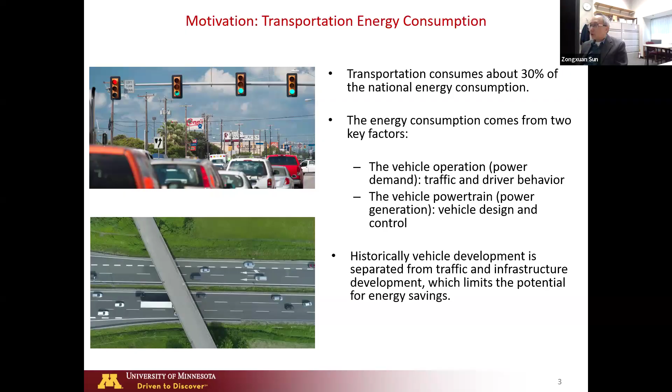So my overall message is I think there will be a lot of opportunities if we can better or seamlessly integrate those two factors. A little bit further argument along that line, people ask, well, sounds good. How do you actually integrate traffic and vehicle? Well, you do that by leveraging two emerging technologies. Those are relatively new, not brand new today, but relatively new. One is connectivity, the other one is automation.

Connectivity today is now widely commercialized. Automation, we have some commercialized already, but I wouldn't say widely commercialized. So connectivity gave us real-time traffic information, including information about other vehicles as well as infrastructure, such as signal phase and timing. So when we talk about traffic, it's not just about other cars. It's about infrastructure as well, because infrastructure controls influence the vehicle operation as well as the traffic.

So the information you collected through connectivity, essentially communication with other vehicles and with the infrastructure, provides you rich information where, if you use it properly, smartly, you can actually anticipate future driving conditions. Basically it means you can anticipate traffic in front of you in the future, not too long a future, but at least 10 to 15 seconds.

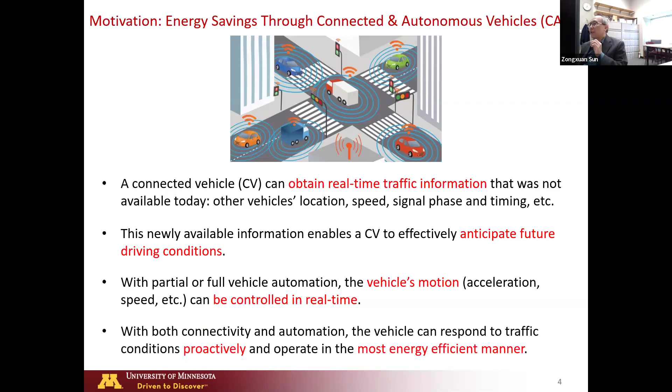And of course, with those two factors together, I think we have a strong opportunity to address the issues I mentioned in the previous slide. Okay, so continue on that.

So how do you actually bring this idea into actual implementation? How do you put this on the ground? How do you put this in the vehicle? How do you put this in the infrastructure to actually see the real benefit? How do we do that? So my group has worked on this for, I would say, probably 15 years now.

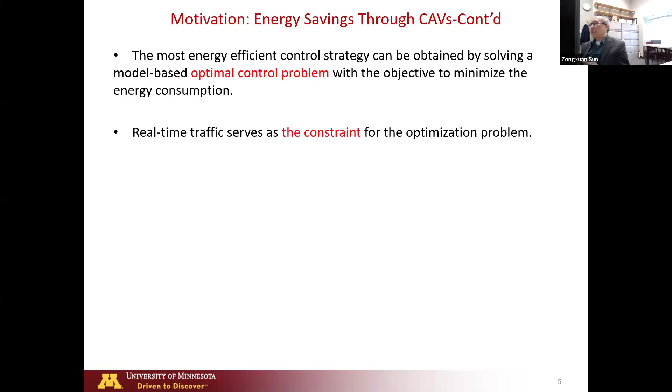So we actually are using the so-called optimal control framework. Okay, so we essentially treat the traffic as a constraint. As I said, you can't just drive any way you want. You have to follow the traffic flow. So we actually proactively predict the traffic. Then we use that as a constraint to our optimization control problem.

And then on the energy saving side, on individual vehicles, it can be saved at two levels. One is the vehicle level, essentially that determines the acceleration, the speed, which is your power demand. And the second level is the powertrain level. Even for the same power demand, you can operate your powertrain smartly, and therefore you have a higher efficiency. So even if your output is exactly the same amount of 10 kilowatts, you are much more efficient in delivering this 10 kilowatts.

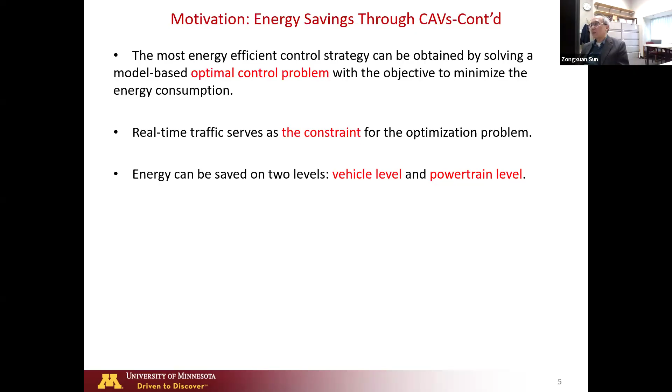Okay, so I talked about both already. So now let me show you what I meant on the powertrain level. So the powertrain level, those are three different type powertrains. You can buy all of them today on the market. I would say the conventional one, which is still the dominant one, is the internal combustion engine with automatic transmission. So that is still the dominant powertrain architecture in America. The second one is hybrid electric vehicle. The third one is electric vehicle.

So different powertrains. I'm not going into the details about the powertrain architecture, which is the primary research area of mine. But the bottom line is for the same power demand, let's say one driver is test driving one car per day. So they are driving all kinds of powertrain architecture, and they are demanding exactly the same power demand. How would you use all the different powertrain architectures to satisfy this driver's demand efficiently? So you have to essentially control those powertrains in real time.

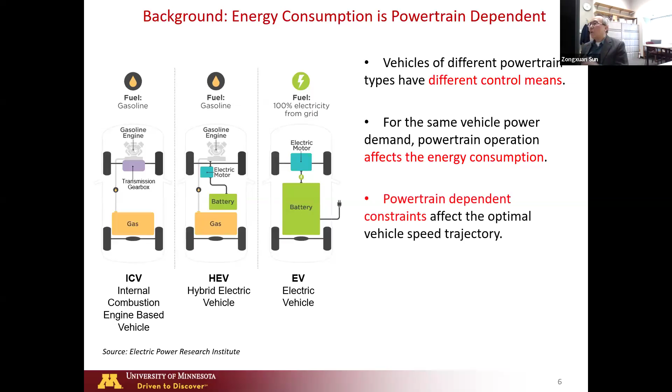Then the question would be, oh, what do I control? Which I talk about in the following slide. But the bottom line is, again, you have vehicle level optimization, essentially the speed and acceleration, and you also have a powertrain level optimization: how do I produce power efficiently to satisfy the power demand? And both have to be connected to the real-time traffic and infrastructure. Only then have you maximized your opportunity for saving energy.

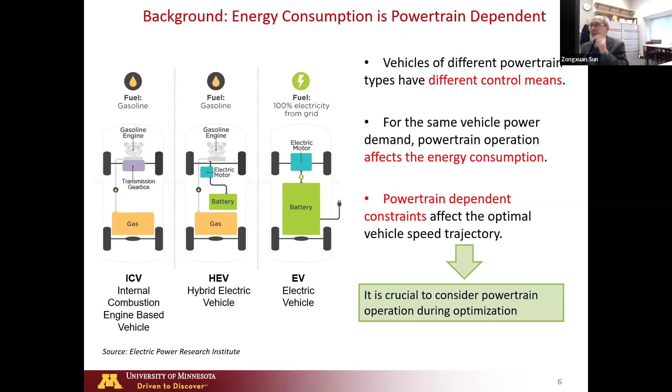Okay, one question people always have when I talk about predicting traffic, they say, well, how can you predict traffic? Because now, even if you have CV technology, not everybody is going to talk to you. And many existing vehicles have no way of predicting, they have no communication device. What do you do? So we recognize the fact, no matter how we introduce a new technology, connectivity or automation, we're going to face a mixed traffic scenario, which means it takes time for the technology to penetrate the market. So we're not going to have 100% CVs. We're not going to have 100% automated vehicles anytime soon.

So there will be a market percentage. So how do you do that? Not everybody talks to you. You say, oh, I collect information, therefore I can predict the traffic, but they don't talk to you. What do you do? Well, you can still predict traffic with limited information. You don't have to have everybody talk to you. You don't have to know every individual vehicle's information.

And therefore, we are using traffic flow theory. We're working with Michael, treating the traffic as a fluid. Then it becomes a continuum where you actually do not need to know individual vehicles. You only need to know information at certain points. Then you use that and physical laws to synthesize the dynamics of the traffic. So that's the basic idea on this slide, because this is a real issue.

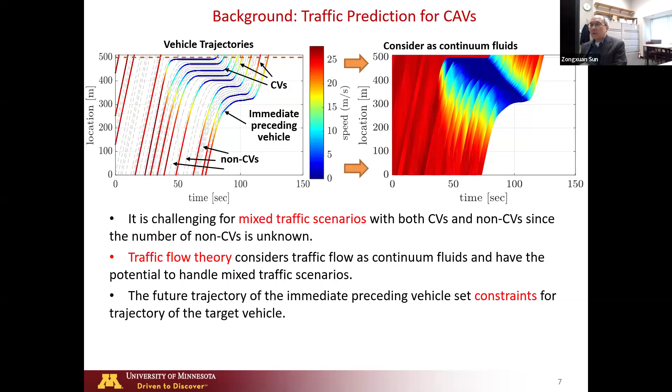So let me now run through a couple examples. I know I spent a bunch of time on background because that was intentional—I want to make sure people at least understand my rationale. When I go to the specific project, I'll run a bit faster, because some of those are a little technical, so I'd be happy to answer questions or follow up. I have to go a bit faster because I've got four examples here.

So the first one is actually a test bed, funded by the Federal Highway Administration as well as MnDOT. The whole idea was that testing all this technology on the road isn't easy, and precisely measuring fuel economy and emissions isn't easy either. We actually have very precise fuel measurement as well as emission measurement instruments in our laboratory, so the idea is: can we have a hardware-in-the-loop test bed?

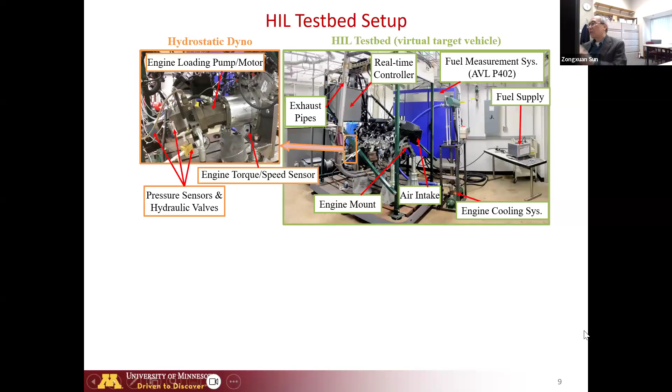With that, we used the same engine, a GM 3.6 LFX engine, which was in a Cadillac SRX. That was the car. We did that, and we obviously had information and data from the vehicle, and we used that to calibrate the model to make sure they actually match.

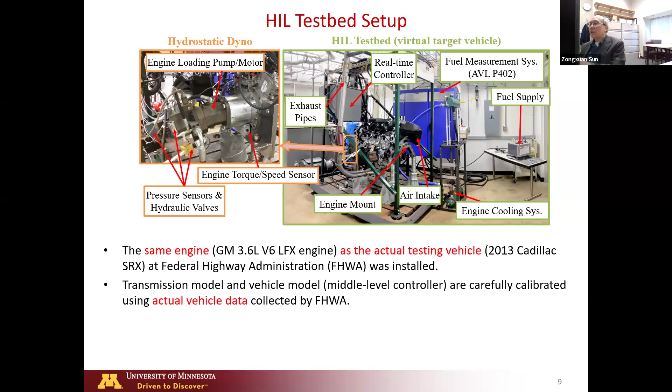So that was the objective: to see if you can evaluate all kinds of energy-saving methods and technologies on the vehicle in the test cell, without actually going to every single vehicle. Going to every single vehicle is costly, and there are also safety concerns. So that was the motivation for this project—essentially a test bed to test energy-saving technologies inside the laboratory with precise fuel economy and emissions measurement.

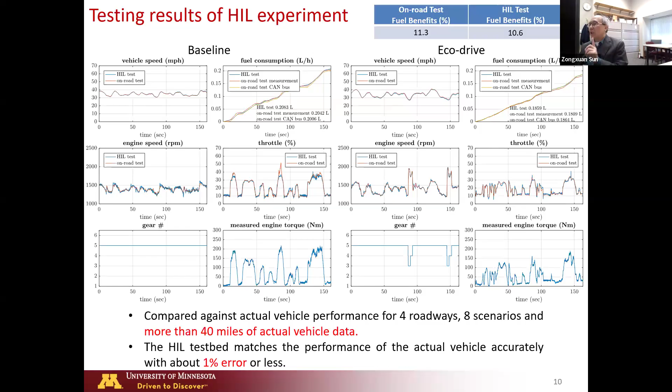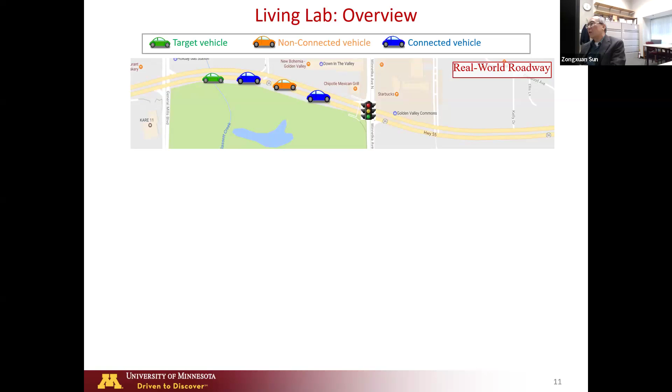So we also did a living laboratory. A living laboratory basically means you get cars driving on the real road, and you also talk to the signal controller. Here you can see the signal controller on Highway 55, and here you can see all the testing vehicles. This way you bring real traffic data into the laboratory.

What we do is the last car here, the green one, is a fictitious car—it's not a real car. This car is actually the test cell, a virtual vehicle inside the test cell, because we get all the information about all the cars in front of this fictitious car through communication. All the other cars are real cars, and the signal is real too, but this one is virtual, as if we are following the other cars.

We can collect signal phase and timing information, and we can get other vehicles' information. Based on that, we predict the traffic, and based on that, we control our own vehicle motion. We also control our own powertrain operation, then we see how much energy we can save. So this is a safe way of testing all kinds of methodology.

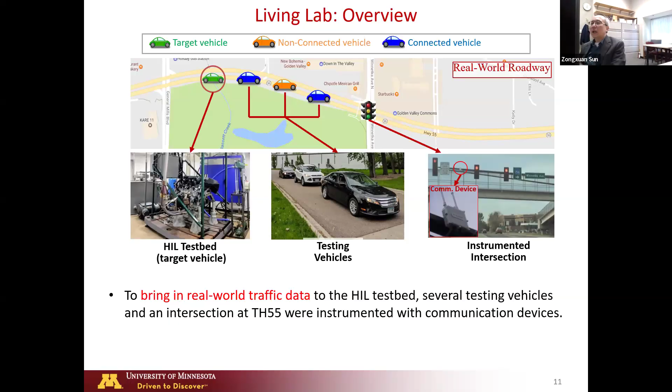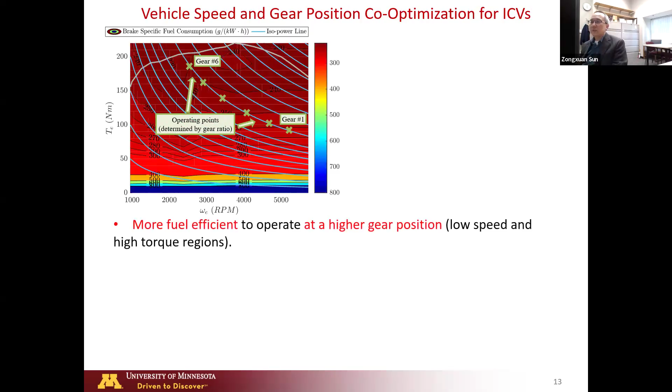So what is the biggest factor that affects a conventional car? A conventional car refers to an internal combustion engine with an automatic transmission—that is still, as we speak, the predominant powertrain in America.

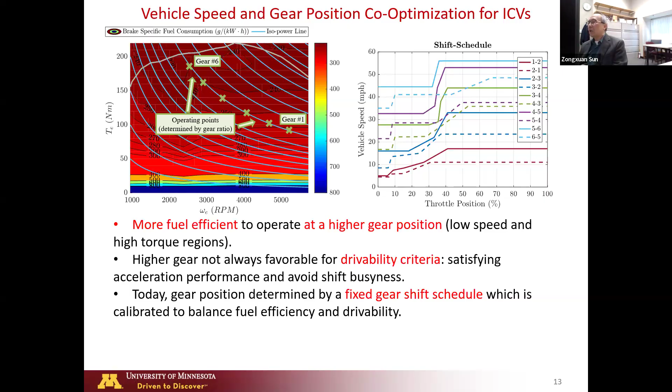But that map is calibrated before the vehicle was sold to you. It knows nothing about the traffic, and it does not know how you're going to use it. If you actually know the traffic in front of you, you can optimize the gear position and gain even better fuel economy. That's the basic idea.

So let me show you the framework we had. Essentially, we have traffic and traffic signal data. We send that to the so-called traffic estimation, then we run a real-time optimal control, which controls the vehicle. That's how you close the loop, integrating traffic with vehicle operation as well as powertrain control. In my domain, this is called model predictive control, meaning you are predicting the future with the model to determine your control.

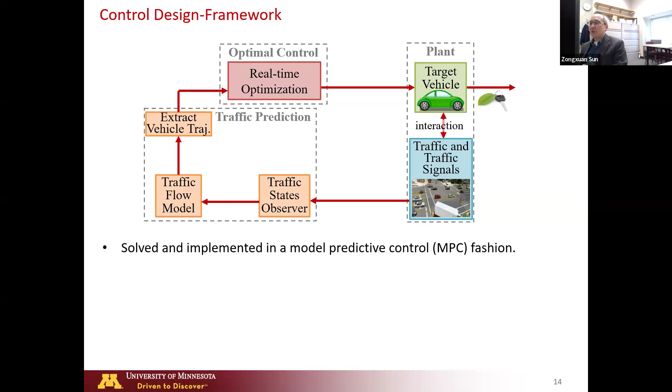I'm not going to go into the details on how these things are done. We wrote a bunch of papers, and if you are interested, I'm happy to share the papers with you with all the technical details.

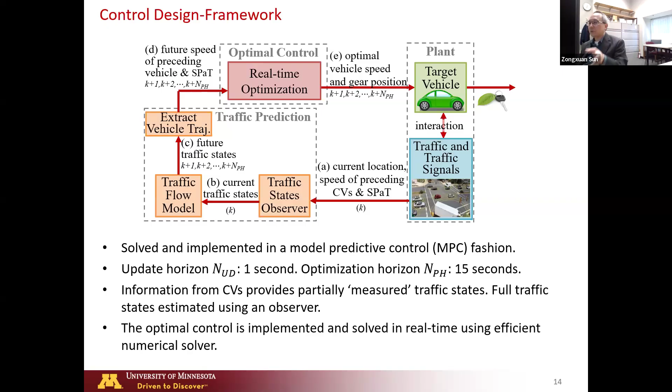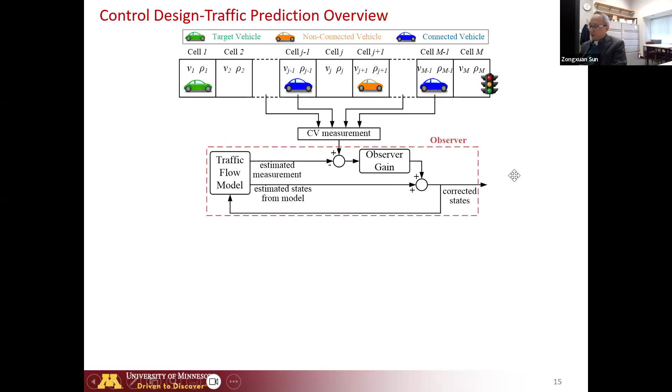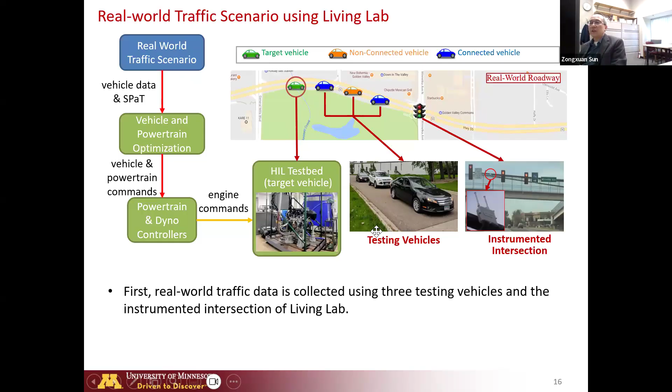That's the traffic prediction part. I'm not going into the detailed series, but just to show you, here's the overall architecture. We get the signal, we get real cars, we get this dyno, so we can close the loop.

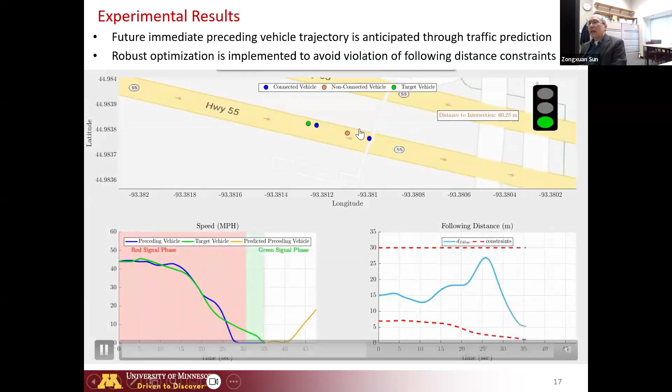Let me just run a small video here. The green vehicle is the one controlled by us. As you can see, because the signal ahead of you is red, it intentionally slows down. You can see the spacing between this vehicle and the preceding vehicle getting bigger as it approaches the intersection, because it knows it's red and there's no way you can pass it. By doing so, it reduces idling time, because as soon as this vehicle arrives at the intersection, the signal turns green, so the vehicle can get going. That's an obvious strategy you can do if you actually know the signal phase and timing.

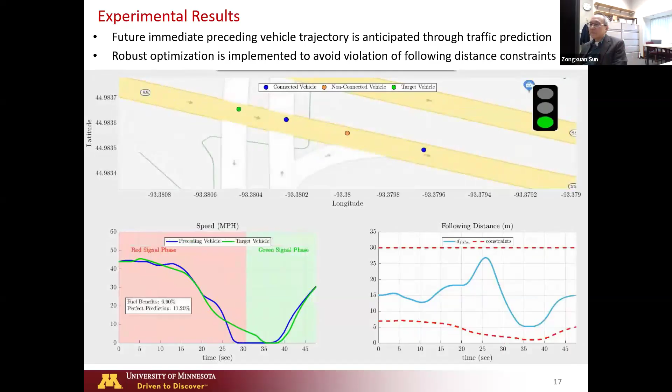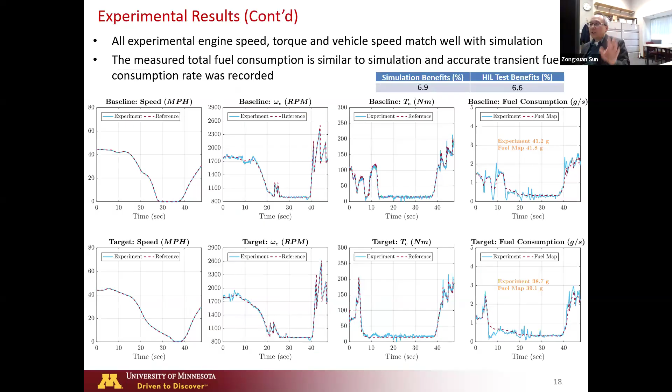This example shows that, and here's what we got from the test bed in the test cell. The engine was driving as if it is on Highway 55, approaching the Winnetka intersection. All the fuel economy and emissions data have been recorded in real time.

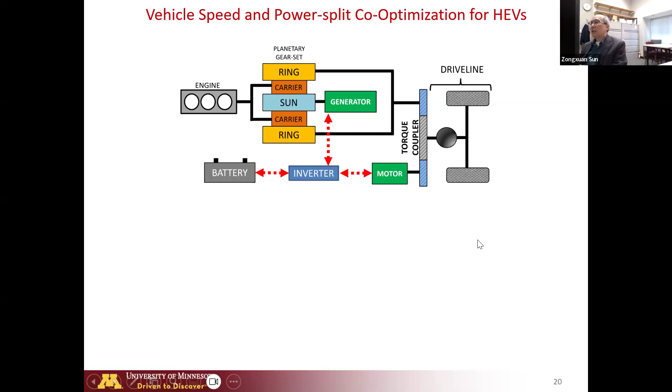Basically, part of the engine energy is being converted into electricity by the generator. Then that electricity is used to propel the motor back to mechanical motion. That's why it's called power split hybrid transmission.

Okay, so that's a hybrid architecture. You have the battery here, and with this extra degree of freedom of the battery, at every time instant, as your car is moving forward, you have a power demand.

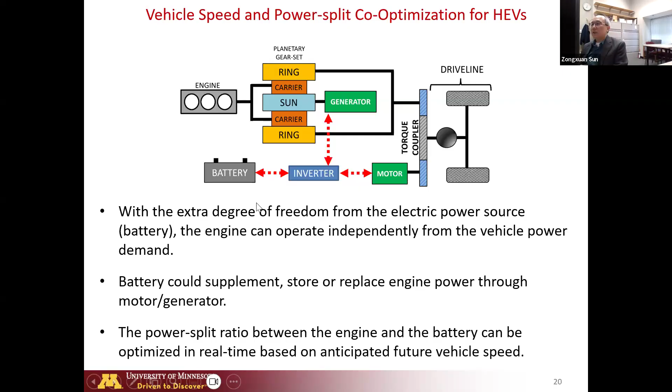You can determine how much power you want to get from the engine and how much from the battery. So you have two choices, you can split between the engine and the battery. That gave you an extra degree of freedom, which you wouldn't have with the conventional powertrain, where you only have the engine. And here shows you the research we did.

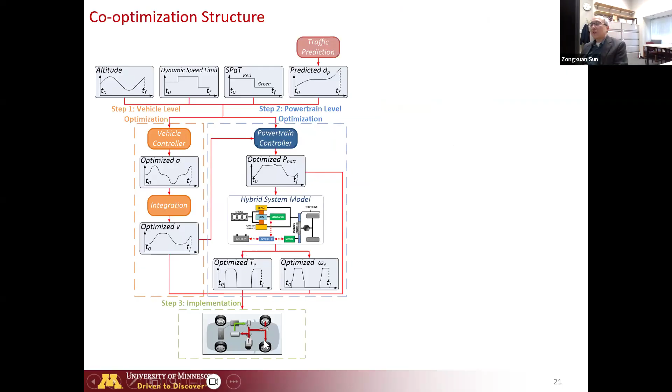Again, you can do traffic prediction, and with that prediction, you can optimize how you want to drive at the vehicle level. Then you go to the powertrain level, where you determine how much you want to get from the engine and how much from the battery. Then you deliver the whole thing to the vehicle powertrain. That's essentially the idea.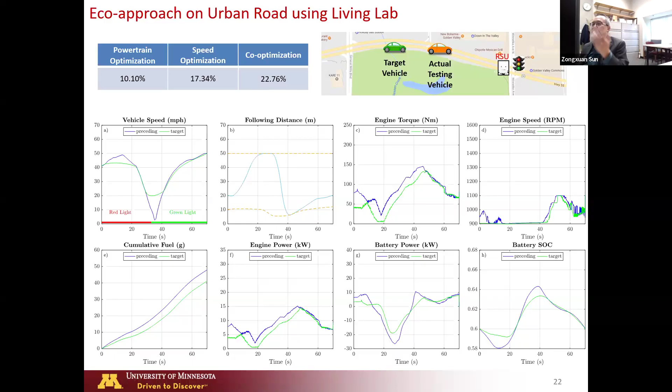you take out the human, and the vehicle knows when to accelerate and decelerate, you get 17%. But if you do them together, you get 22.76%. So that's the benefit we found.

Last topic, electrical vehicle. With an electrical vehicle, obviously you do not have an internal combustion engine. All you have is a battery, inverter, and electrical motor going to the wheels of the vehicle. That's what you get. By the way, in this specific presentation, I show you a fixed final drive, which is the most typical arrangement in today's EVs you buy on the market.

However, there are a few EVs that actually have more than one gear after the motor, so you can have a 2-speed or 3-speed transmission even for an EV. In fact, my students have done work on a multi-speed electrical vehicle study, so if you're interested, I'd be happy to talk to you about that as well.

So if you have that, you also have to make a decision about which gear you are in for the EV at every time instant. That also has significant energy implications.

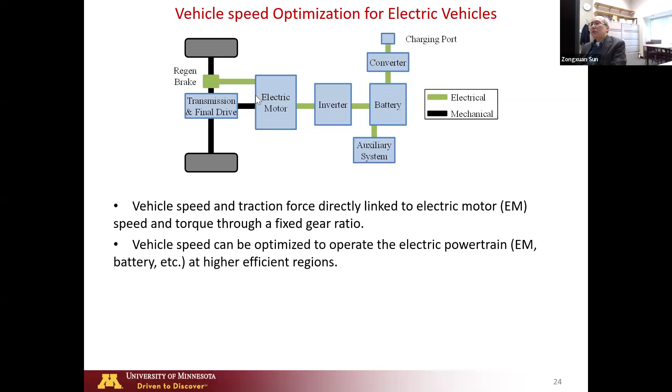With a fixed gear, when you drive at different speeds, because the gear is fixed, your electrical motor speed is determined as soon as your vehicle speed is determined. But your electrical motor efficiency depends on speed and load, so we have to bring in the efficiency map of the motor as well as the efficiency of the battery into consideration when we optimize the overall vehicle efficiency. That's a key consideration here.

The other consideration is regenerative braking. With the electrical vehicle, you can have regen, meaning as you slow down, rather than using a mechanical brake to burn out all the kinetic energy, you actually convert that into electrical energy. You want to maximize your regen.

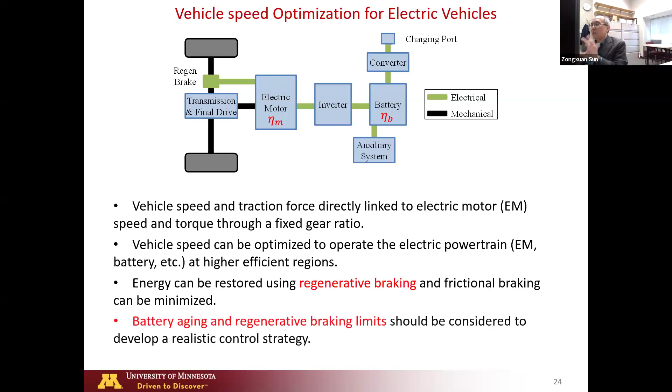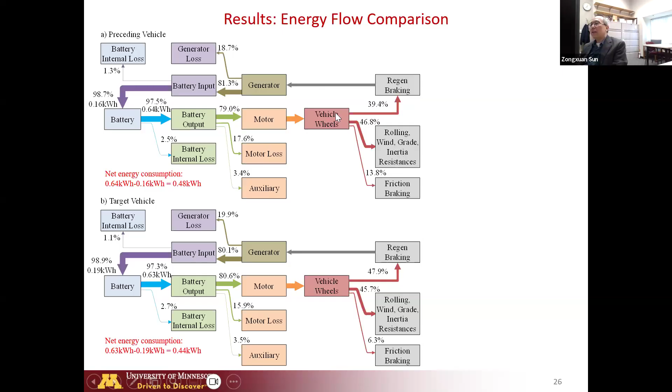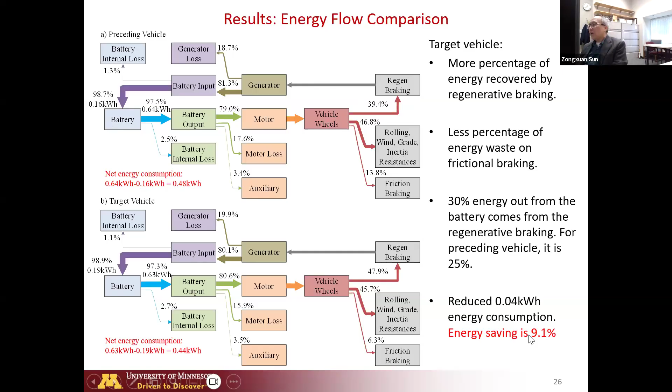So you can see the bottom line is, with the optimization, we are improving about 9.1%. We have less energy going to the mechanical brake and more energy going to the regen, saving 9.1% as a whole. That brings me to the conclusion.

So again, my message, as I said at the very beginning, is that integration of real-time traffic and infrastructure information with vehicle control can offer significant opportunities for reducing transportation energy consumption.

This has not been done historically. There was a good reason for that, okay? But I think now with the two new technology, connectivity and automation, we are at the time there is a good opportunity we can really integrate these two factors in transportation.

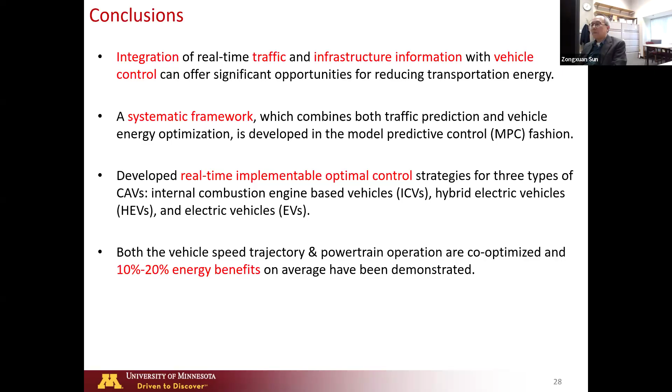A systematic framework which actually tries to combine this under the so-called MPC, model predictive control, has been presented today. And we also show real-time implementation applied to 3 different powertrains: the conventional one with the engine, the hybrid electrical vehicle, as well as the electrical vehicle. We show you can get between 10 to 20% benefit depending on the traffic and depending on the type of powertrain. With that, I'll stop my presentation. Thank you.

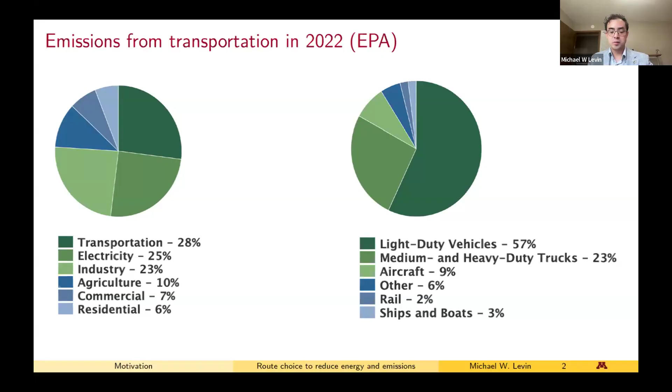I'd like this graphic to introduce what we are gaining by focusing on emissions in transportation. This is from the EPA in 2022. They release a new graph like this every couple years or so, but the numbers don't change that much. The emissions from the USA, if we look at total greenhouse gas emissions, 28% come from transportation. And if you look at the breakdown of transportation specifically, in terms of vehicles on the road, we have 57% from light duty vehicles and 23% from trucks. So there's a lot of opportunity to improve total US greenhouse gas emissions by reducing emissions from transportation, and that's what we want to focus on.

When you're driving in congestion on an arterial or on a freeway, you have a lot of frequent speed changes. What happens with speed changes is that you have to spend energy accelerating, and a lot of that energy is often going to be lost when you have to brake to slow down, unless you have a really good regeneration system for a hybrid or electric vehicle. Another thing is that road power depends on how fast you're driving, but looking at the powertrain side, internal combustion engine vehicles, which are most of the vehicles on the road, are usually more efficient at higher speeds. So with congestion, there are two impacts that result in emissions being higher relative to driving without congestion.

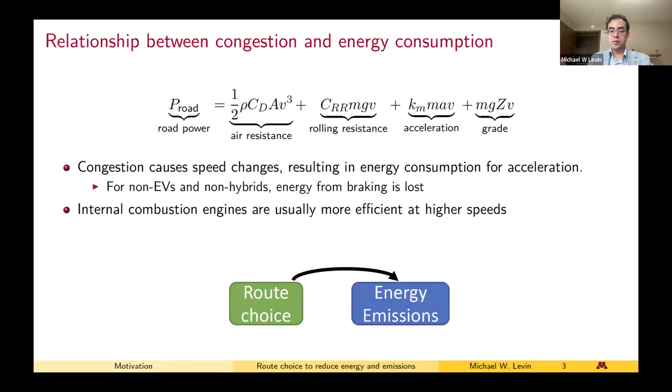And that's exactly what Google Maps started doing in 2021. If you wanted to open up your phone right now, you would see that there's an option in the settings that says, do you want Google Maps to give you routes for the minimum travel time or the minimum CO2 emissions? By default, Google Maps is set to minimize your individual CO2 emissions, which is related to travel time, of course. Having a long travel time is going to increase your emissions, but it's not exactly the same. So right now, most people using Google Maps, unless they're particularly aware of this and changing their settings, are probably going to be minimizing their individual carbon dioxide emissions instead of their individual travel time. Okay, great.

If you have 40 to 50% of drivers trying to minimize their individual emissions, that's going to affect congestion patterns. The route choices of those drivers based on emissions will affect congestion patterns, which affects the emissions that result from those route choices. So the question is, if you have 50% of drivers trying to minimize their individual emissions, how does that actually affect the total system emissions for all vehicles, both the ones minimizing emissions and those minimizing travel times? We have this feedback loop where route choice affects emissions, which affects route choice, but an equilibrium forms as your emissions affect your route choice, which then affects the emissions of other vehicles.

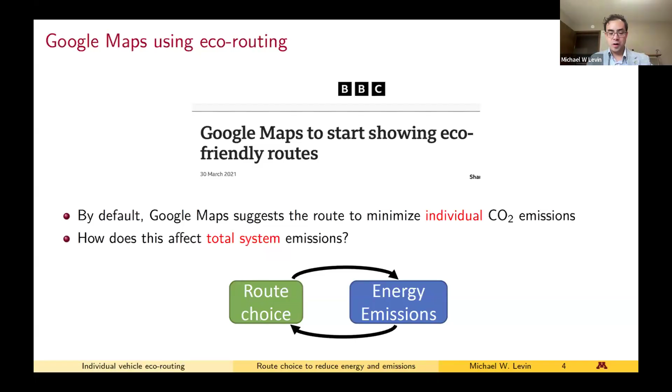Before I show that, I want to go back to a classic example of looking at route choice and travel times, because that one's easier to understand. There's a well-known concept from the 1950s called user equilibrium, which is the idea that when drivers choose routes to minimize their individual travel times, their route choices affect the travel times of other drivers, which in feedback affects the route choices of the drivers as well.

We want to find user equilibrium, which are route choices where no driver can improve their travel time by changing routes. In other words, you're on the shortest route and there's no incentive to change. That's user equilibrium behavior, true for everyone. But it's not the same as minimizing traffic congestion. This is similar to emissions, because instead of route choice and travel time having feedback, with eco-routing we have route choice and emissions having a feedback loop.

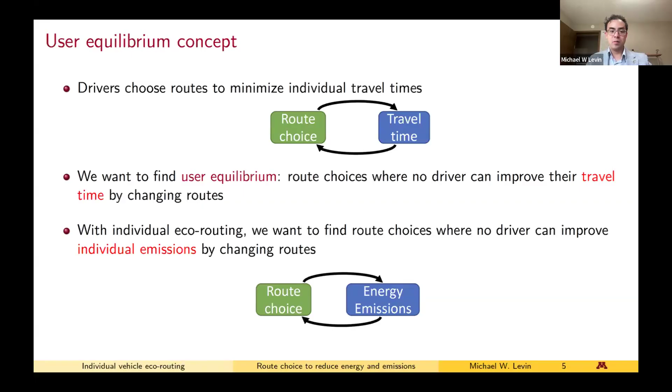Let's spend a little time looking at travel times. I want to review the well-known Braess paradox, which demonstrates the problems with individual travel time, or user equilibrium behavior, which is what people are normally doing when minimizing their individual travel times.

I'm going to draw this simple network. It has 4 nodes, A, B, C, and D, with one-way roads connecting A to B, B to D, A to C, and C to D. The functions shown are the travel times. The travel time from A to B is x over 100, where x is the flow, the volume of cars. A to C and B to D have constant travel times, so no congestion there. C to D has a travel time of x over 200.

If we look at 4,000 vehicles per hour traveling from A to D, the split that forms user equilibrium is 1,000 vehicles going on path A to B to D, and 3,000 vehicles going on path A to C to D. The reason this is user equilibrium is because the travel times are equal, meaning there's no incentive for any driver to switch paths, since they'd have the same travel time.

The classic example is: let's say we have this network and we build a new road from B to C, with a constant travel time of 5 that never gets congested. So what happens to the user equilibrium behavior? Ideally, when you build a road, you'd like travel times for everyone to go down, right? That's why you build roads, to make transportation better.

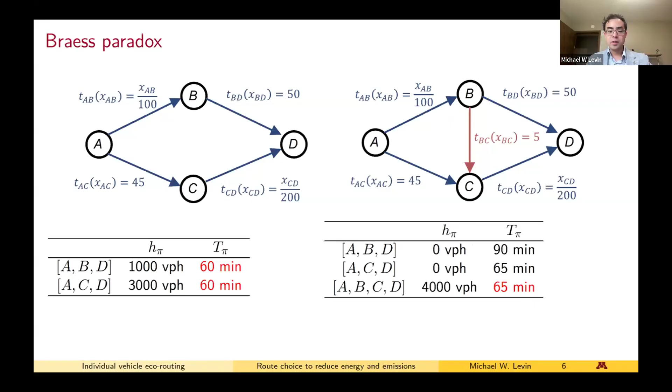What happens is that by building this link, or changing, in other words, the route options for travelers, we now have everyone creating a lot of congestion on links A to B and C to D, and paradoxically, that makes the travel times for all drivers increase because they're all trying to minimize individual travel times. So in other words, there's this well-known fact that building or improving a road can make traffic worse due to user equilibrium route choice. There have been a few examples, I think, in New York, Germany, and South Korea, where people observed this in practice.

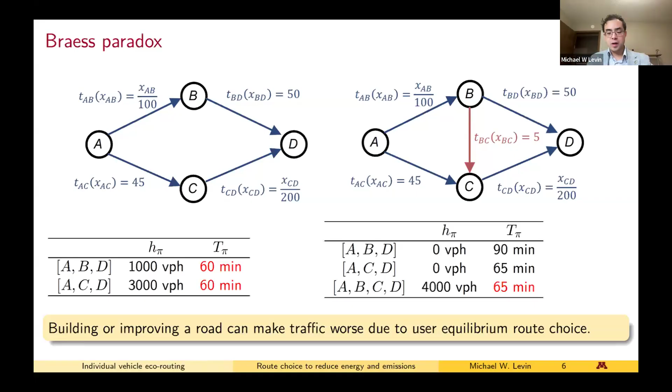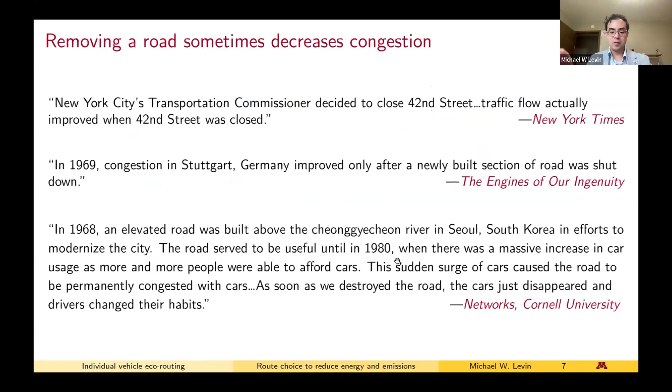So of course, this is for travel times. I want to focus on emissions. We're going to see a similar effect there. Yeah, so here's a slide with the examples I found in New York, Germany, and South Korea. You can look these up as well. It's basically the reverse situation where they removed a road and found that travel times went down by removing a road.

So looking at this Braess paradox, this is saying if we build a road, we can actually increase travel time. And the reason that happens is because when you build a road, you're hoping that road reduces the total system travel time or the traffic congestion. But when drivers choose to minimize their individual travel time, that's actually a different goal. It's a subtle difference, but it's a different goal, and that results in different route choice patterns.

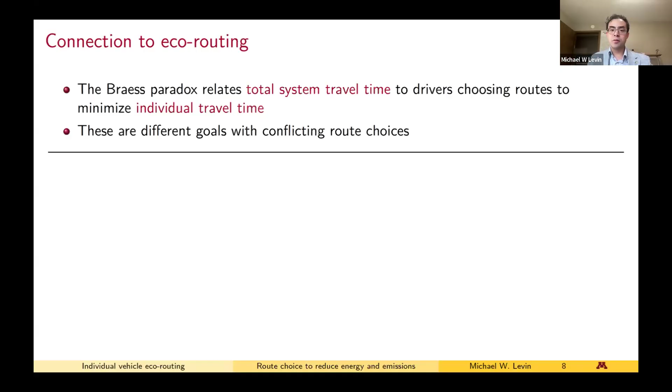So we're going to see the same effect when we look at Google Maps. By guiding people on routes to minimize their emissions, if we have enough people following Google Maps, we end up creating scenarios where the goal of reducing individual emissions is different from the goal of reducing total system emissions, and these actually conflict.

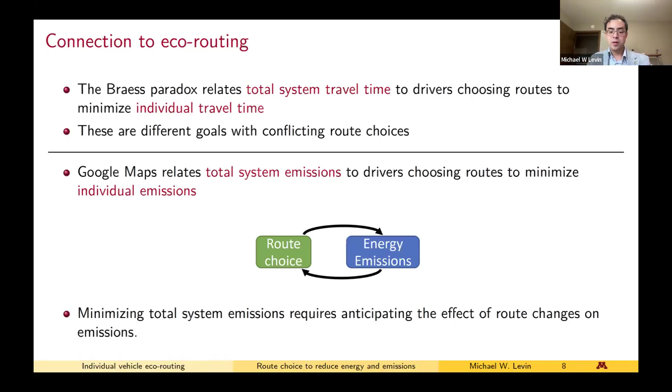So in other words, when we try to minimize total system emissions, we really need to anticipate the effects of these route changes on emissions. If we just try to minimize individual emissions, we're not necessarily going to reduce our total system emissions at all. And so that's what I'm going to show you in the next few slides. We want to look at how well individual vehicle eco-routing works.

Now, to do that, we have to create some models of the emissions that people would use to choose their routes. And I've obtained some models from a paper in Transportation Research Part A from 2013, where they used the EPA's MOVES software, which is very well accepted in terms of predicting emissions, and they input a standard traffic model, and they ended up with these regression models for fuel consumption and emissions.

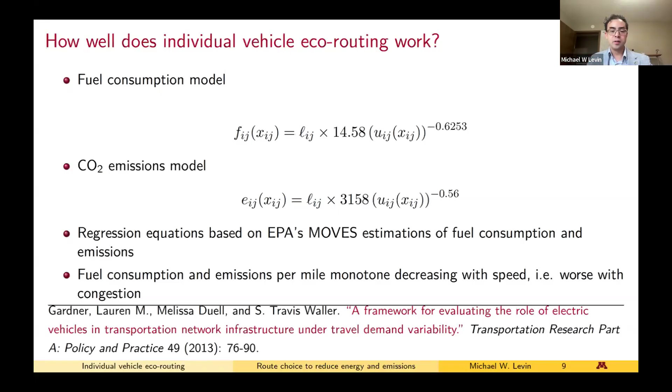These are interesting because they're monotone decreasing with speed. In other words, as congestion increases, the fuel consumption and emissions per mile increase, which is the pattern we would expect, as we saw a few slides ago. So what we're going to do is predict that drivers will choose routes to minimize either fuel consumption or emissions, and we want to see how that affects total fuel consumption and total emissions.

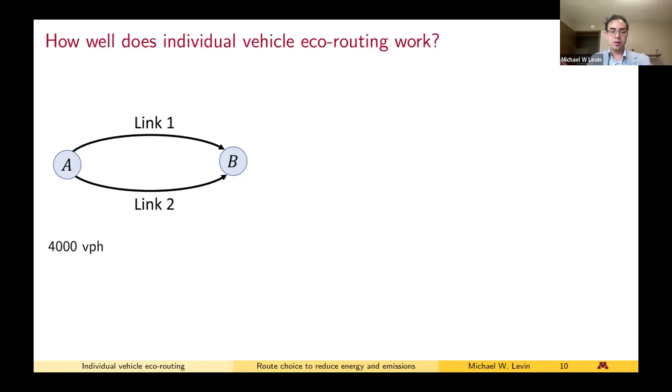So let's start off with a very simple network with just two links, link 1 and link 2. So drivers are going from A to B. There are 4,000 vehicles per hour going from A to B, and they have the choice of either of two links. Now, what I was looking at is what happens if you vary the parameters of these links? And specifically, let's vary the length of link 2 and its free flow speed.

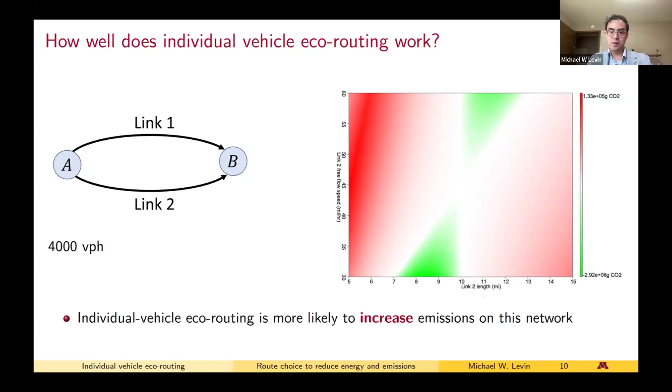Why does this happen? It's because the route choice patterns create different congestion patterns, which cause different levels of emission. And I want to do this not just on a simple network, but also on larger networks. And to make this more realistic, I've also created examples where some of the drivers are eco-routing, some of the drivers are trying to minimize their travel time.

So in other words, the route choices affect congestion or emissions, congestion affecting emissions, of course, and then those affect the route choices. In other words, what we want to do is find a mixed user equilibrium where it's a route choice solution where no driver can improve their goal by changing routes, and the goal of each driver could either be minimizing their travel time or minimizing their individual emissions.

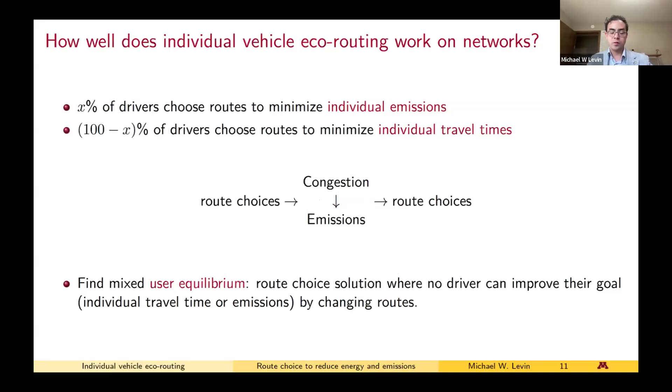So I have several networks here. These are networks that are standard test networks, are publicly available, but they are fairly large, a lot larger than the previous toy example I created. And so the point of this is to show the effect of eco-routing on various cities. So let's look at Eastern Massachusetts, for example, which is on the left here. As you can see, as the eco-routing proportion increases, the total emissions decreases slightly, and then it starts to increase again as the proportion of eco-routing vehicles passes 50%.

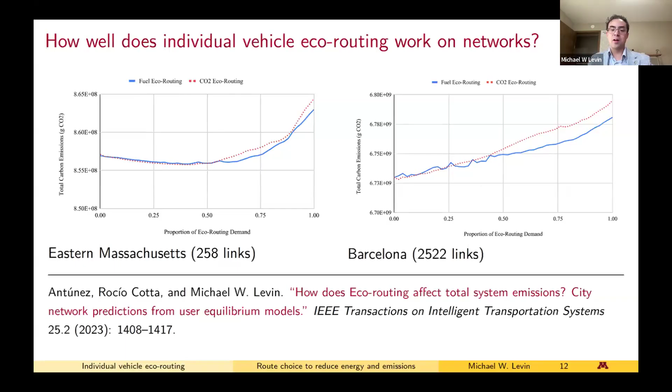Looking at the right network, Barcelona, we see that the total emissions is just mostly increasing with the proportion of eco-routing demand. So in other words, what's happening is that as we have a large number of people eco-routing, that affects the congestion patterns and it causes emissions to increase. Now, that's not true for every city. Winnipeg has the same pattern where increasing numbers of eco-routing vehicles increase emissions, but Chicago is the opposite pattern where as people start eco-routing, the emissions decreases.

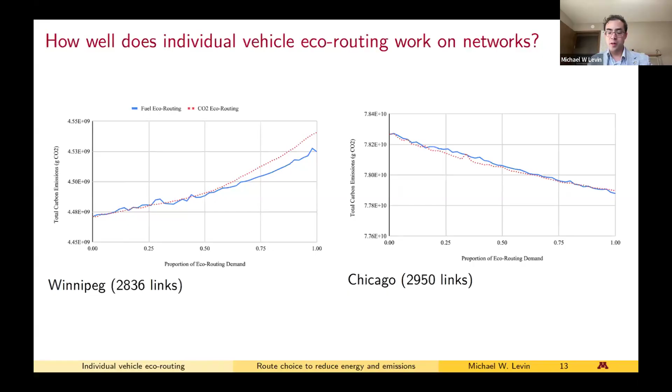But hopefully this kind of demonstrates that it's not as simple as just trying to get people to minimize their individual emissions. We need to do something more complicated. And the fact that Google Maps is actually giving us routes to minimize individual emissions may not necessarily be good in every city. It may be increasing emissions in some cities. So that brings us to the question of how do we actually minimize total system emissions with route choices? Because indeed we can. So looking at that problem, we have to consider why it's difficult.

If we try to choose routes to minimize total system emissions, we have to consider not just the impacts of routes on an individual vehicle's emissions, but we must consider impacts of route choices on congestion, which would affect the emissions of other vehicles. So in other words, if you decide to use, say, I-35 instead of Highway 88, you're now affecting congestion on I-35, which is going to affect the emissions of other vehicles using I-35. And if there are a lot of other vehicles on I-35, you've now possibly increased the emissions for other vehicles while reducing your own. So you have to consider those impacts when we want to minimize the total emissions and not just your own emissions.

There are a couple other things that make this very difficult to solve, though. We don't really know future travel demand. In other words, there's a lot of uncertainty or stochasticity about when people want to travel and where they want to go. And if we're creating a planning model, we don't have to deal with that stochasticity. But if we're trying to route drivers as in Google Maps, we would, because Google Maps can't predict where people want to drive. What happens is as you pull out your phone, you ask for a route, and Google Maps has to give you a route. It doesn't know that in 5 minutes, someone else will want to drive to other places. So it can't plan for future traffic.

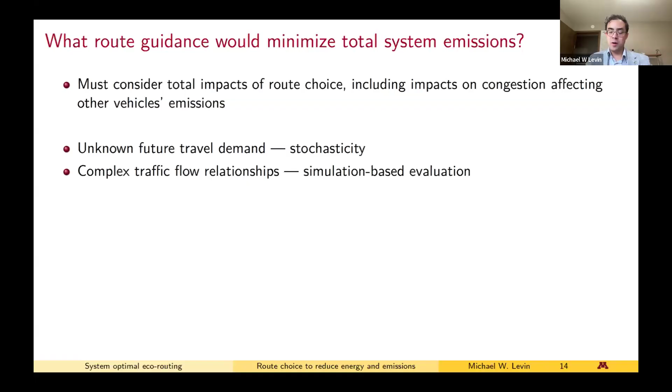The other problem that we run into is that the relationship between route choice and traffic congestion and emissions is actually very complex. And the models I showed before were simplified versions used for long-term planning. But if we want to reduce emissions on a day-to-day basis, we really need to use a more complex and realistic model. And these models exist, but they usually require simulation to solve, which makes it quite hard to solve optimization problems. So there are basically three algorithmic approaches that we might consider when Google Maps is asked for a route. How could we try to give the eco-routing to minimize total system emissions? So the simplest one is a long-term planning approach, static traffic assignment model.

It's a very simple traffic flow model. It's great for planning, still used. It doesn't really handle stochasticity in future travel demand, nor does it have complex traffic relationships like queue spillback, traffic signals, things that do matter in the day-to-day behavior.

The next extension is dynamic traffic assignment, which includes those complex traffic flow relationships, but it still does not have stochasticity. The other problem with dynamic traffic assignment is that optimizing it requires solving a very large optimization problem, and no one's actually managed to do that on any networks of reasonable size.

So the third approach that includes both stochasticity and complex traffic relationships is a Markov decision process model. We need a Markov decision process for stochasticity. It does model complex behavior, but it becomes even more difficult to solve in a traffic assignment. So keep in mind as we go through this, what I have is probably not the optimal solution, but we've done some mathematical work on getting something that seems to work pretty well.

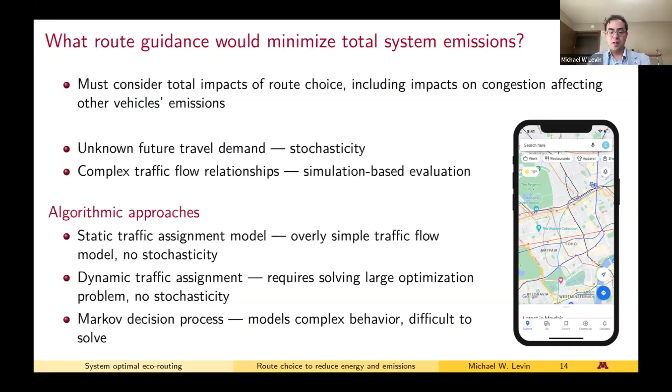So I want to spend some time describing this model. There's a lot of math here, so I'm going to go briefly through it. I want to hit on the concepts of how we model this. So we need to track the movement of vehicles over time. And the way we track that is by looking at segments of roads, like the segment of a road between two intersections. If we look at how many vehicles are on that segment of road, changing over time, there's a conservation law. The number of vehicles at time t plus 1 is the number of vehicles at time t minus all the vehicles that exited plus all the vehicles that entered.

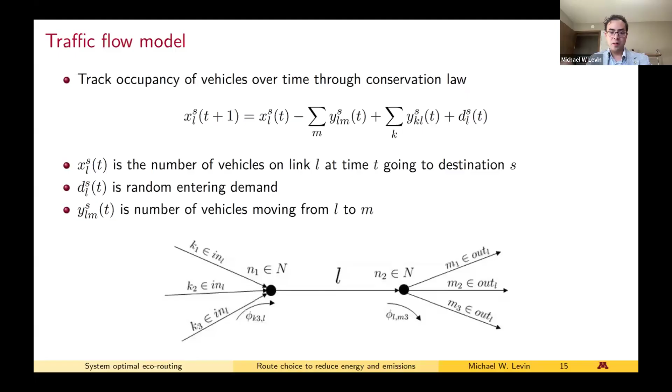So this graphic at the bottom shows an illustration of what that would look like. If we look at link L, there are 3 incoming links where vehicles can enter and 3 outgoing links where vehicles could leave. And the number of vehicles on link L, by conservation, stays the same unless vehicles exit or enter. We can also add intersection constraints to model whether vehicles are entering or exiting based on the proportion of vehicles that want to move from L to the next link, and then we can add further traffic signal constraints on this traffic flow model.

So what that would look like, in other words, is we have this Markov decision process where we have a one-step transition between the number of vehicles on a link at time t and the number of vehicles on a link at time t plus 1. It's a one-step transition because it's based on the entering and exiting vehicles at that time point. There's stochasticity in terms of entering demand, which creates a stochastic transition. The control variable is actually our route choice.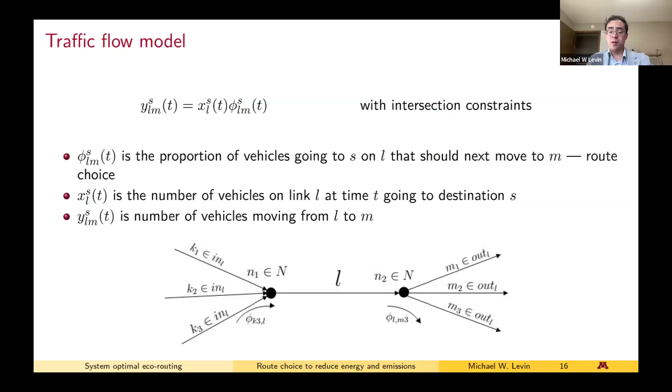So if we look at the vehicles on link L, someone's going to decide which link they go to next. Do they go to link M1? Do they make a left turn? Do they go straight to go to link M2? Do they make a right turn to link M3? That's what we call phi, or whatever their route choice is. So that's what we're going to control. And we can control this at each time point. At each time the vehicle tries to leave a link, we can decide where they go, which is akin to Google Maps updating the shortest path in the middle of your drive based on updated information.

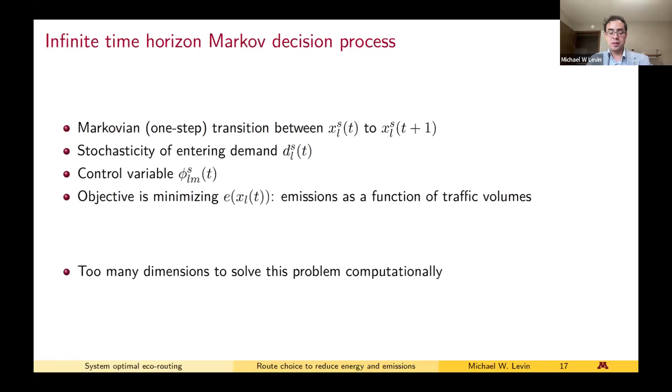The objective here, of course, is minimizing the total emissions, which you could write as a function of the traffic volumes on various links. It's just impossible to solve this computationally because there are too many dimensions, so this runs into the well-known curse of dimensionality. So instead, we're going to derive an algorithm that has nice mathematical properties in terms of reducing emissions. This builds on the max pressure approach, and the conceptual idea for max pressure is we choose a performance metric, find a simple algorithm, and then prove that our algorithm mathematically achieves that performance metric.

So the typical metric used for these approaches is maximizing throughput. And the way you formulate that in math is saying that the number of vehicles in a network remains bounded over time. What that means is that as vehicles are entering the network over time, people are departing their houses, they're departing parking garages, they're entering the network to drive somewhere. The number of vehicles in the network will increase as vehicles enter. So the only way to make this bounded is for vehicles to exit at the same rate at which they enter.

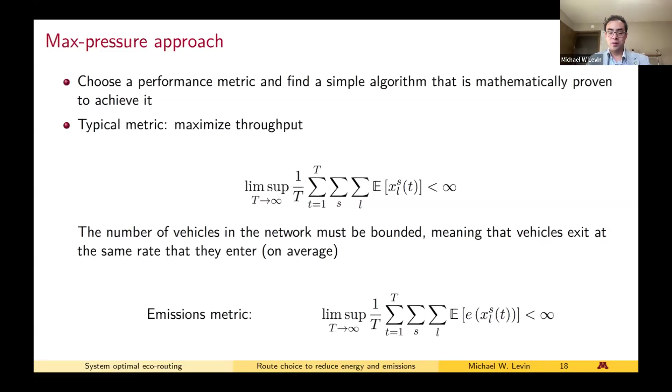So entering vehicles equal exiting vehicles on average, which achieves maximum throughput. Now, of course, we don't want maximum throughput here—what we really want is to minimize emissions. So I want to replace the idea of number of vehicles in the network being bounded with emissions in the network being bounded. If vehicles are accumulating in certain links or those links are becoming very congested, the emissions will become very large. So we want to maintain boundedness. Now this is admittedly not the same thing as optimizing total system emissions, but it does tend to work, as we'll see.

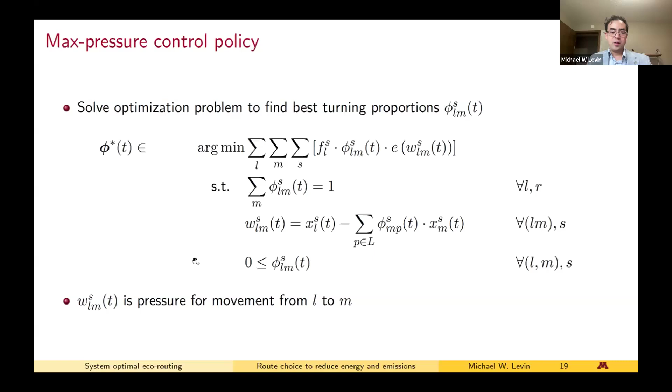For the max pressure algorithm, we want to solve an optimization problem to determine where people should drive. This looks like a nasty optimization problem, but it's actually quite easy to solve. What it's really doing is computing weight functions—basically the difference between queues approaching an intersection versus queues at the far end. In other words, we want to move vehicles from long queues to short queues, or from areas of large emissions to areas of smaller emissions, to get vehicles out of congested areas. The rest is just various constraints on those movements.

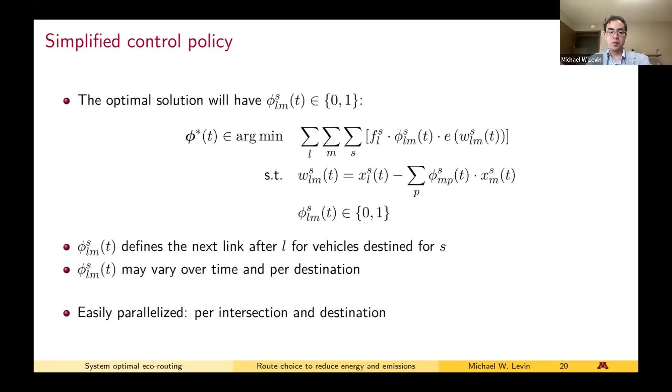We can do some mathematics to simplify this control policy. The main point is that this algorithm is very easy to parallelize—we can compute it per intersection, per destination, which makes it possible to run in real time, unlike some other optimization approaches which would involve solving very large optimization problems requiring many hours. So this is something we could do in real time.

Why does it work? Well, we can get some mathematical properties. First, let's define a set of demands D, which is a set of demands that could be stabilized by any route choice policy—thinking about minimizing travel time, maximizing throughput, or minimizing congestion. There are many different route choices. The set of demands D is the set we could serve from the best route choice. If our demand is not in that set, it's impossible to stabilize the network in terms of keeping emissions bounded.

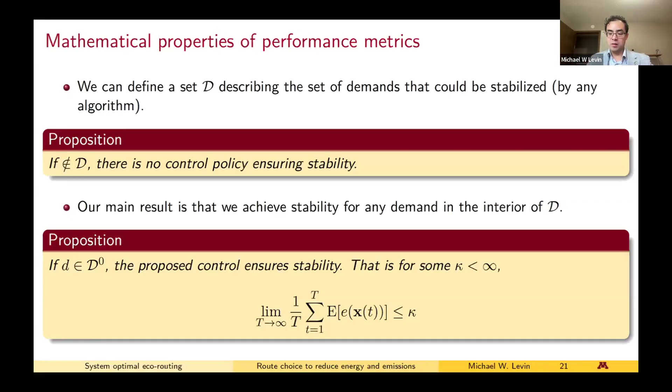What we do achieve, though, is that if our demand is in the interior of the set, then we can ensure stability. In other words, the total or average emissions in the network will remain bounded, which is kind of nice—it's saying that our emissions won't blow up, because route choice will try to avoid emissions being large from congested links.

There are some mathematical reasons why this might work. First, we need to achieve maximum throughput to maintain stable emissions, and that justifies the max pressure approach. If we don't have maximum throughput, that means vehicles are accumulating in the network, causing congestion, and that congestion is increasing over time, resulting in emissions.

The other implication of this control algorithm is that emissions will tend to be lower than alternative route guidance algorithms, because we're trying to maintain bounded emissions and not let congestion emissions go off to infinity. This differs from individual eco-routing because there's no guarantee that when everyone's trying to minimize their own emissions, it won't cause congestion patterns that negatively affect the overall network's emissions or throughput. In fact, we've seen situations where trying to minimize your own travel time creates large congestion on freeways or other areas, making emissions worse.

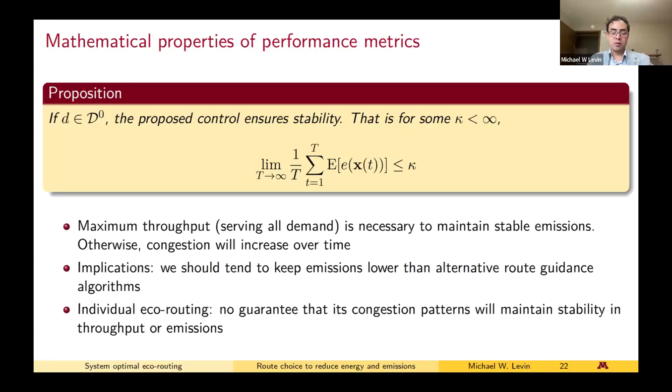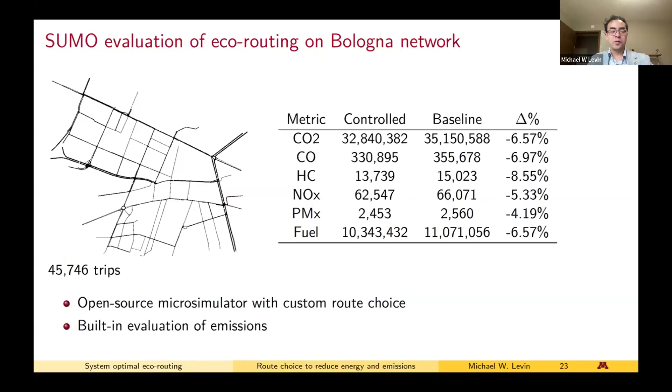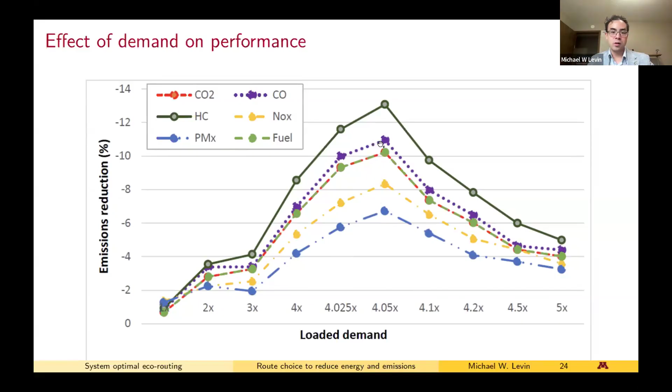So our best effect occurs at a high demand, not the highest demand, but at some point in the demand scale you're going to see a peak of what our eco-routing can do, which is over 10% reductions in emissions. Now there are probably more opportunities to improve this. This is unlikely to be optimal, but 10% reduction in emissions is a good starting point.

So to wrap this up with some conclusions, the main takeaway is that when we're eco-routing to minimize individual emissions, like we are with Google Maps right now, that can actually increase total system emissions due to changes in congestion patterns. We created several examples of networks where it does in fact increase total system emissions.

Particularly there are larger networks where increasing the proportion of vehicles using eco-routing, so like over 50%, the eco-routing vehicles change congestion patterns in such a way that emissions became worse. It doesn't happen on every network, but the fact that it does happen means we should spend more time scrutinizing whether eco-routing is a good idea on particular cities.

For example, I don't know whether it's a good idea in Minneapolis-St. Paul or not, but we do know that Google Maps is using eco-routing in Minneapolis and St. Paul, and it's not clear whether it's increasing or decreasing our total emissions.

Now, if we want to decrease total emissions, there are ways to formulate the problem and develop algorithms. We created one algorithm that could be run in real time that gives route guidance that tends to reduce total system emissions. It does handle stochasticity in terms of not knowing future travel demand, and it also has a realistic traffic flow model. We have numerical results in a detailed simulation, which is probably the standard of simulations in terms of predicting traffic congestion and emissions.

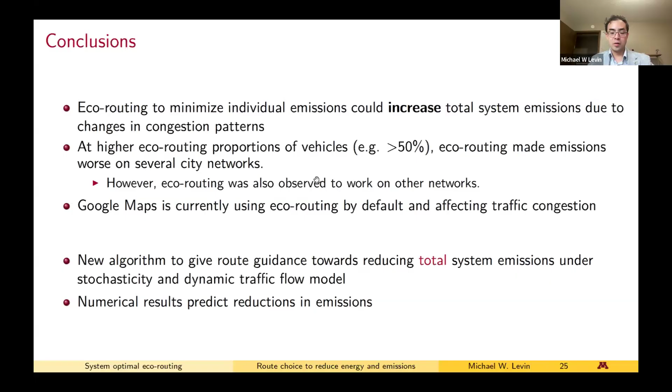So it's possible to reduce our emissions. We just need to make sure we're studying that to reduce it and using algorithms to reduce total system emissions.